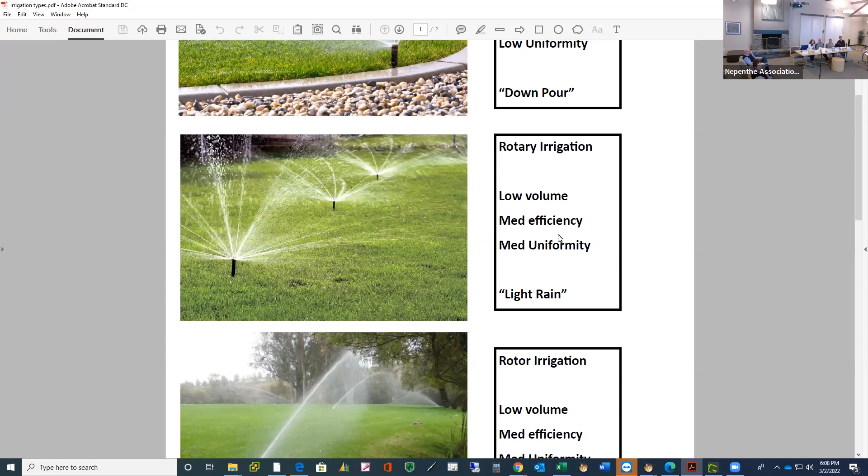And the newer style, and you have these on your community as well, we call them rotary nozzle. Nick? Yes. This is Mary Gray. Do you have the percentage of the number of sprinklers that we have of each one of these, so we would have a feel for what's out there in our community? I don't have that for you today, but I certainly can get that for you. Thank you. You're welcome.

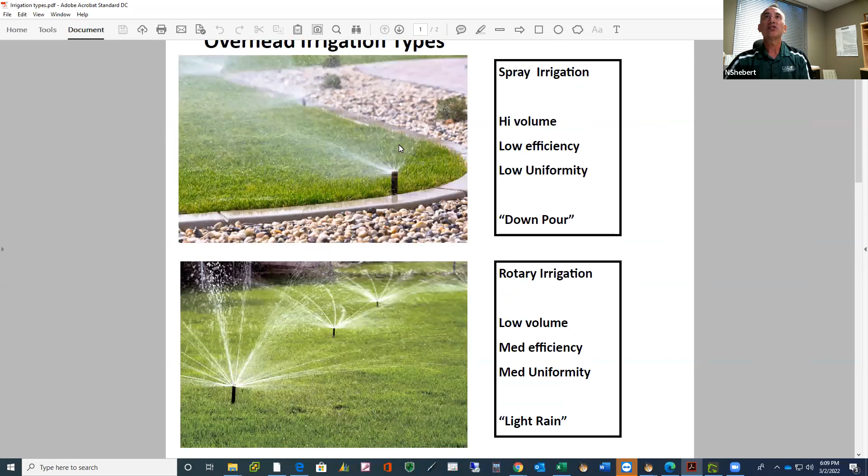The next would be the rotary irrigation. So there's been a big push over recent years to switch to these style nozzles. They're pretty recognizable. They have these streams of water and they slowly kind of rotate. If you compare it to the first one, which is a high volume, these are a lower volume output, which means they don't put the water out as fast. Their efficiency is considered in the medium range and their uniformity is medium as well. So in my rain scenario, that would be more considered a light rain application.

The application of these tends to be less than the rate at which the soils can absorb them. So they're a lot better at it, and they are less affected by wind. So you don't get as much off-site movement of water, and they tend to distribute the water more uniformly as well. And then the next style that you have are rotors. They're pretty recognizable as well. It's a single stream of water that shoots out, and then the whole head rotates that stream of water. That's also considered a low volume head, with medium efficiency and medium uniformity. Also would be considered a light rain.

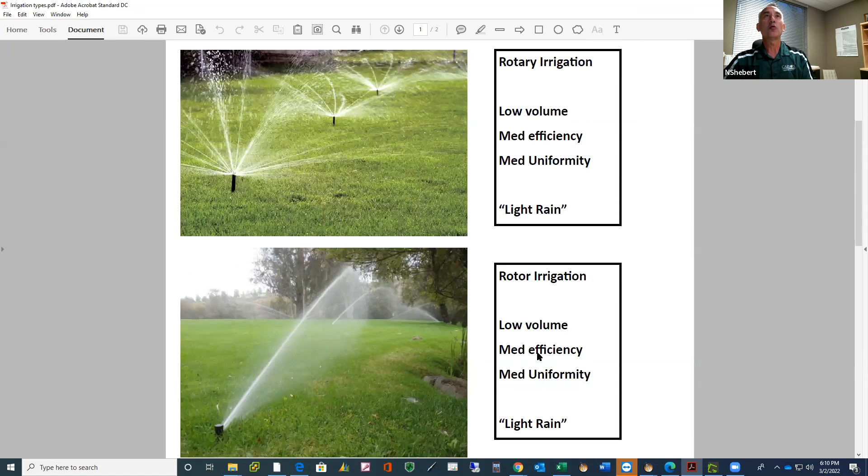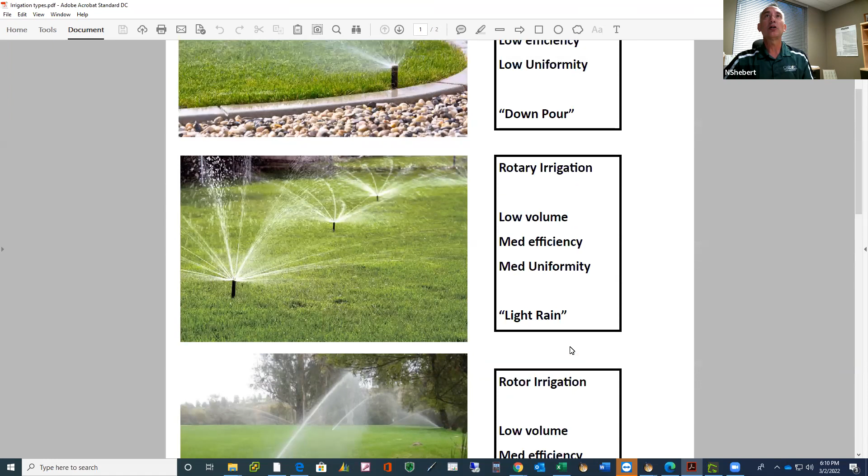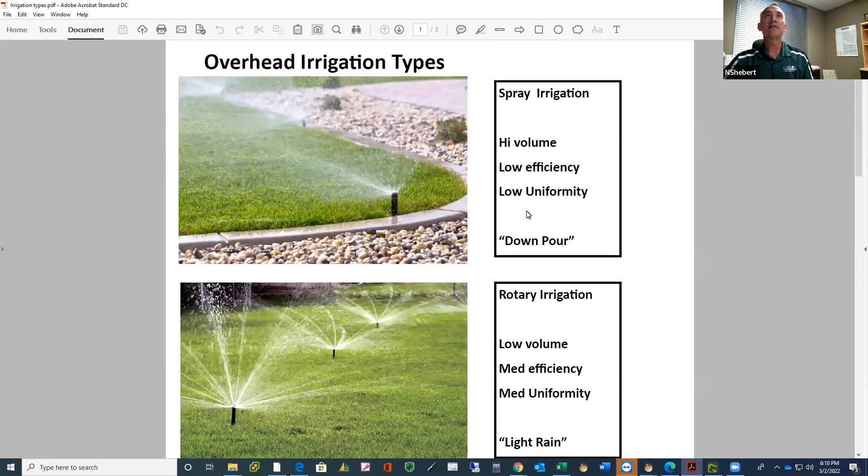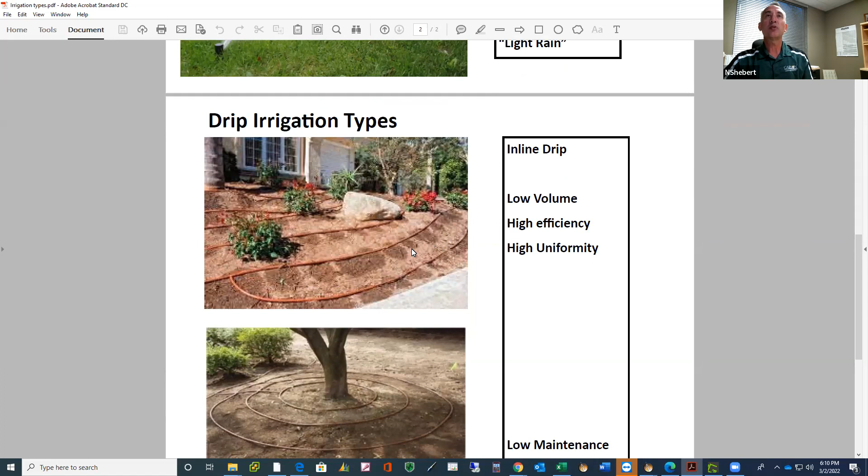So in overhead irrigation, the two preferred methods for the best use of water would be the rotor and the rotary nozzle. And just generally speaking, I'd say your spray irrigation is probably in the lower 20% when you look at your overhead. The majority of them were converted pretty well, but there's still some out there. And then we look at drip. So at some point in time, your community put in this style that we call inline drip. It's most prevalent around all the homes.

So there's basically a single tube that snakes around the landscape areas, and it has holes every so many inches where water drips out of it and makes the area wet. If you run it long enough, these wet areas kind of coalesce together. And if you were to dig down below the surface, like where it shows it dry right here, it's actually wet because the water soaks in as it goes down. So it might look like it's not getting everything wet, but underneath the soil it is. So this is a way we do it for a landscaped area. You could have plants put in throughout here, or here's how we handle them on trees.

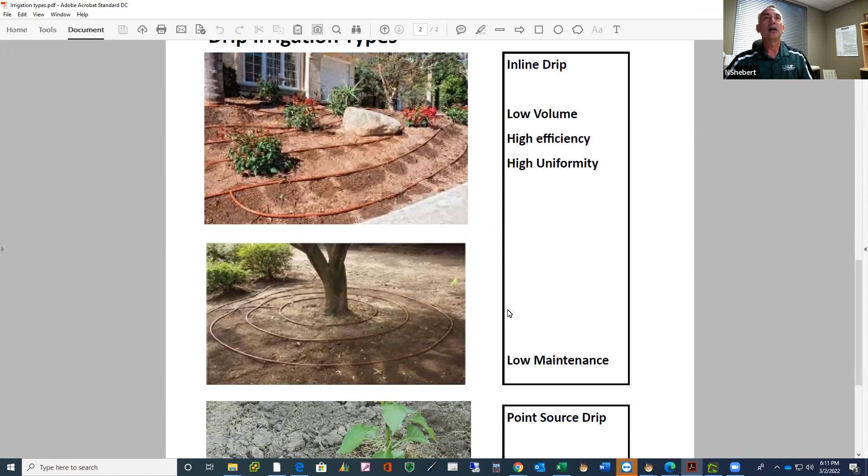It's a very good slow application of water. It's very highly efficient, meaning there's not a lot of runoff. So the water that's applied, most of it goes into the soil and it's used by the plants. This type of drip is considered a low maintenance drip versus what some people think of as more traditional. This is watering a pepper, so sorry, it's not a landscape plant, but still applicable. Basically you have a single tube running around, and everywhere there's a plant you have what we call spaghetti tubing with a drip emitter at the end of it. You don't really have that on your property, which is kind of good from our perspective, because this stuff takes a lot of maintenance.

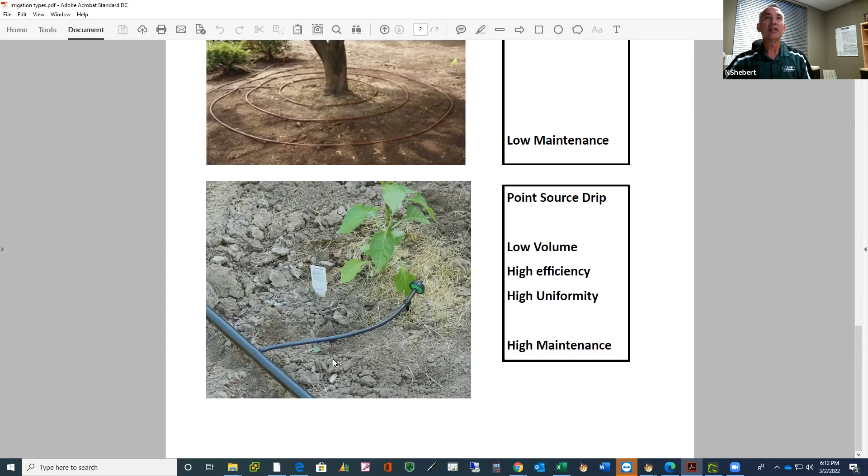It breaks easily, things get clogged easily. There's just a lot of trouble with these. So we don't have a lot of this going on. Most of it, all the drip you have is with the inline drip. Are there any questions about these basic irrigation types and the types that you have?

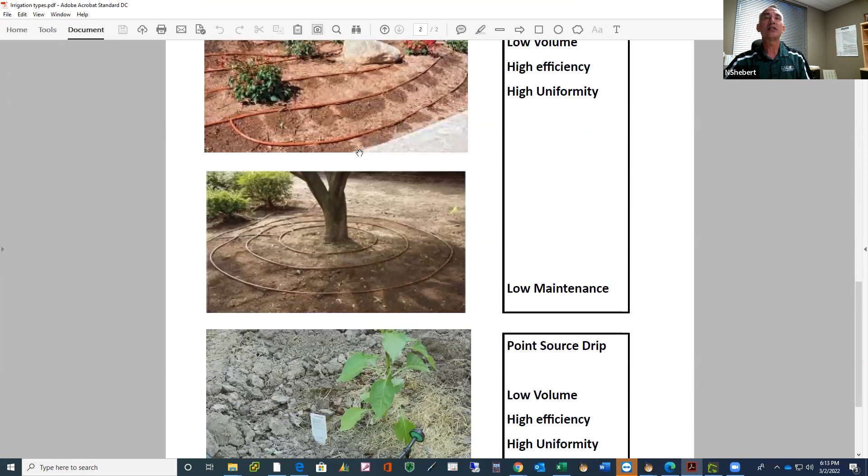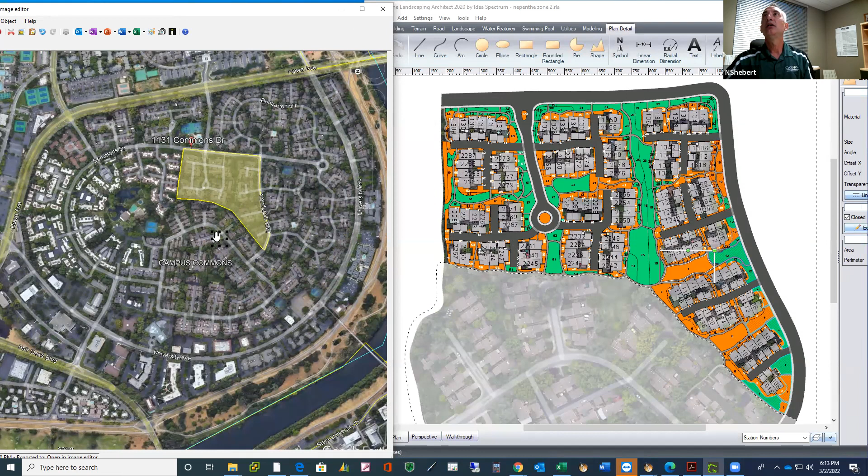All right, great. So I'm just going to jump into a map here. So here's kind of an overview of your property, of your different zones. I'm going to pinpoint here on zone number 2, which I have highlighted in yellow, just to give you a reference point. So we're going to jump over here and zoom in on that. So here's that zone 2. If we could see, the clubhouse would be up over here.

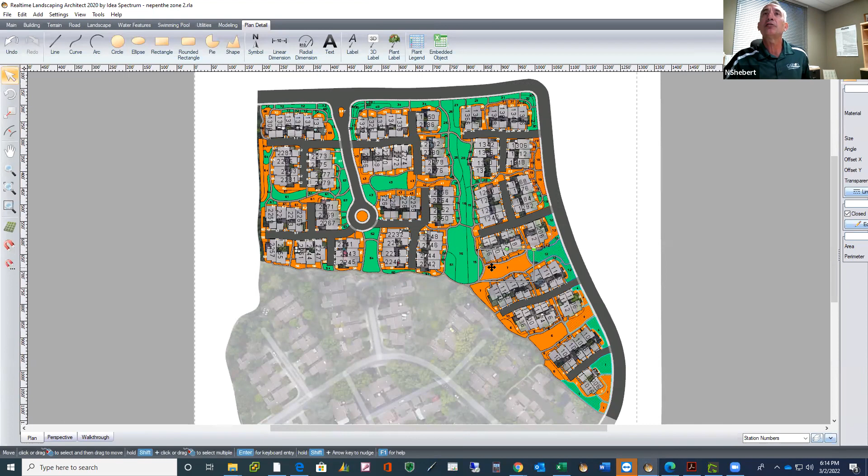And the way this works is, this is a result of the mapping that we've been working on for you guys. We have all your zones mapped in this manner. And I'll zoom in so you can see it better. I know it's very small. The green areas are turf areas. The orange are just shrub, ground cover, trees, basically anything but turf. And then as I zoom in here, the numbers are the station numbers.

So we call a valve a station in the irrigation world. That valve is attached to the controller via a wire. And when we turn on number 7, for instance, all the sprinklers attached to that valve will turn on. So the numbers here are that station number. The black numbers are over anything that's overhead spray irrigation, whether it's the 3 types: the rotor, the rotary nozzle, or the overhead spray.

And then the white is, I'll zoom in some more, the white is the inline drip. So when you did your irrigation system, they did a good job of putting the inline drip surrounding all the homes. I would imagine that's to keep the water from hitting homes. So that's a good thing. And the plant material is conducive to having that as well.

So in this case, when we turn on zone number 8, all of these beds with the number 8 on them get water at the same time through that drip tubing system going through this area. So zone 8 is a pretty big zone. If we come down to this little area here, zone number 2 is a much smaller footprint. For this one, zone 3 did just this side of the houses, and zone 5 did this side of the houses. Do I have any questions so far?

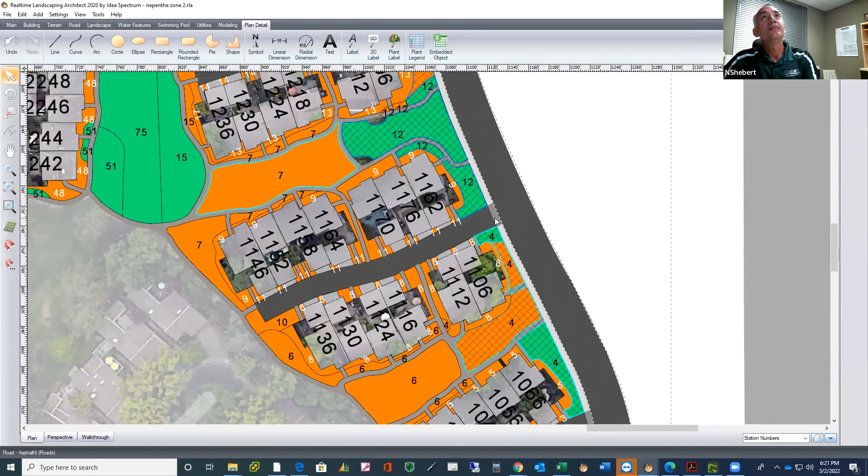Yeah, so there's varying situations and ways to handle problems like this. And I think what's chosen as the way to handle it is going to be dependent on each area. Like if I move up here, this number 4. Well, no, because you got this bigger piece of 4, but yeah, there might be a small area of turf that you could eliminate and make it all shrub. Might be a choice.

So to solve this, we have to look at each area and look at the right way to solve it. Down here, it's possible for these ones to take the drip line that's part of 2 and run it into all this number 1, abandon and cap all the heads that are here in 1, and just bring the drip tube out into all this one area. That's a way to do it.

So if we were going to try to solve some of these, each one would have to be taken on a case-by-case basis: what do you want out of your landscape in this area? Do we want to eliminate or change the plant material, or do we want to change the irrigation method? Or the third option is to put in two valves. One valve would do the green ones and one valve would do the orange ones. Each of those are possibilities that have to be looked at individually. All right, thank you. Certainly.

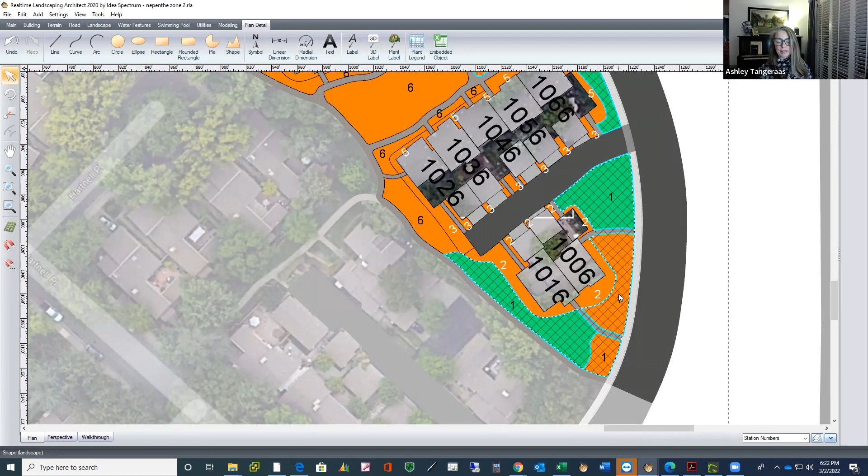So the other thing to think about when you have situations like this. Well, let's go over here. All these 8s, let's say you decided to renovate the alleyway right here and put in drought tolerant plants to save water. If you don't change the plant material out here that's also watered by number 8, you're not really going to save any water, because you have to water for the higher water use out in these areas while you put in lower water use plants here.

So you almost have to convert. If you want to put in low water use plants, you have to look at the whole number 8 as your renovation area if you want to do it for water conservation purposes. So that's another thing I'd like you to consider as you're thinking about what you're going to do. Let's just put in some drought tolerant plants? It's not quite that simple if you want to really save water.

Is it possible, Nick, to, I don't know, I'm picturing like little shutoff valves or things that would restrict the amount of water coming through, say 8, on certain portions of the line. Is there such a thing that can do that?

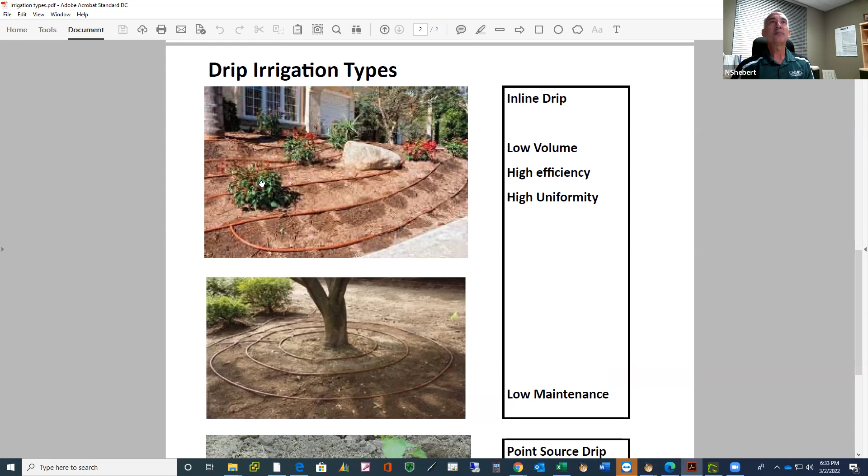Wasn't Netafim actually invented for turf? I don't know that it was invented for that. It was something they tried to put into use for turf. But there's many reasons why it doesn't work very well that I could get into if you wanted to, but it generally is not an effective irrigation method for turf.

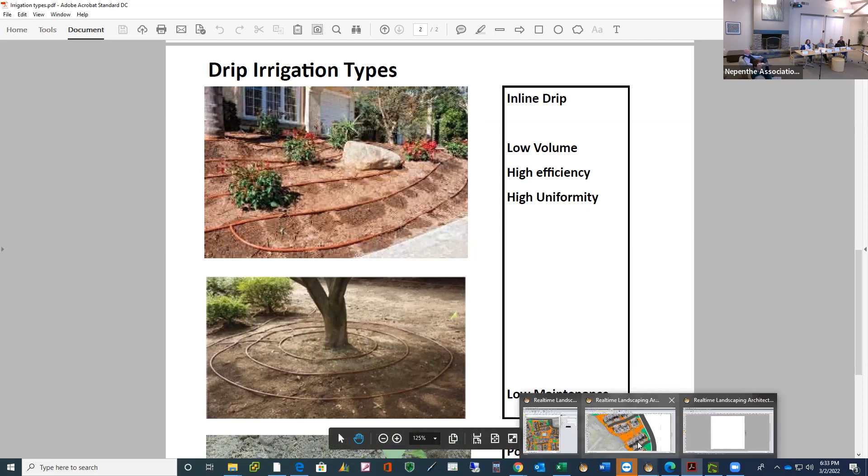Okay. Nick, we could talk about this for a long time. It's super interesting and I really appreciate your time. Unfortunately, we have a business meeting to conduct. So unless you have... That is all.

So just keep in mind as you're having discussions amongst yourselves about water conservation that this does exist. This is something that could be looked at. We could do a full study and try to come up with a plan for you if you guys want.

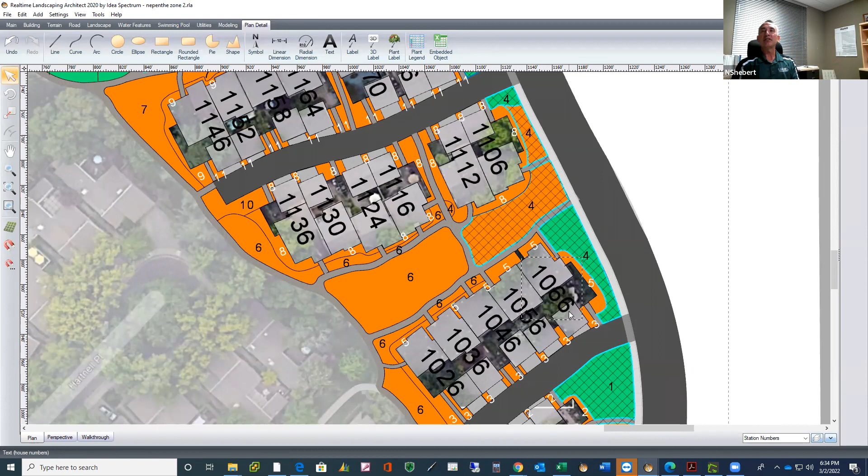And just keep that in mind as you're having discussions about water savings. The discussion is much more complex than just saying, let's change the plans.

Sure. Okay. Nick, thank you very much. You're welcome to stay for our meeting, but we'll probably bore you to death. So if you check out, we will understand. All right. Thank you.

This is Oscar. I just want to add something if I can. Sure, Oscar. The only thing that I just want to add, so you guys may be asking yourselves what we're doing right now to try to solve some of these situations that we have. So at this point of time, what we're doing, basically Nick knows about this.

So if we're running the Netafim for 30 minutes, we have the ability to do cycle timing on that and soaking time. So that means that if I'm running it for 30 minutes, it will run for 10 minutes and then wait another 2 hours, 120 minutes, so it can run again for another 10 minutes. So that basically also saves any runoff or anything like that. I just want to add that so you guys know what we're doing on top of that too.

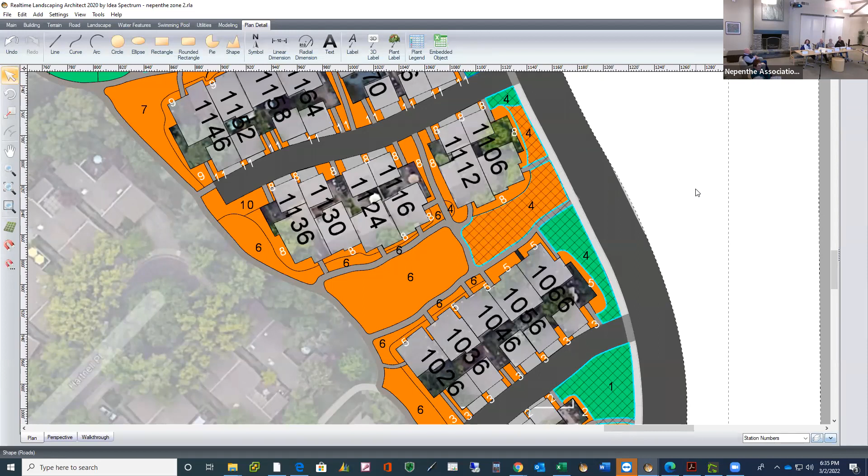Thank you, Oscar. I just want to say something really quick. Oscar made those brownies in the kitchen. So thank you, Oscar. Thank you, guys. You're multi-talented. Okay, Nick, thank you very much. You're welcome. Again, you're welcome to stay on. We'll probably put you to sleep though. Okay. Yep.

Let's move on with the rest of the meeting so that we can be a little bit efficient with our time. I'm not going to call on committee chairs unless they have something to say. So any committee chairs who have something they want to add, you're free to do it. Otherwise, we're going to keep going. Hearing none. Okay. Betsy, you have a management report briefly? I have the management report in your packets.

Ken, did you want to address the board? I just wanted to comment on the one. This is Ken Luttrell, Chairman of the ARC. Yes, this is the month of the architectural applications for windows. That's all we had were windows, 7 of them. I just wanted to comment on the one on the consent calendar, 206 Dunbarton Circle. We had not submitted a recommendation for approval. I understand you have now. Yeah.

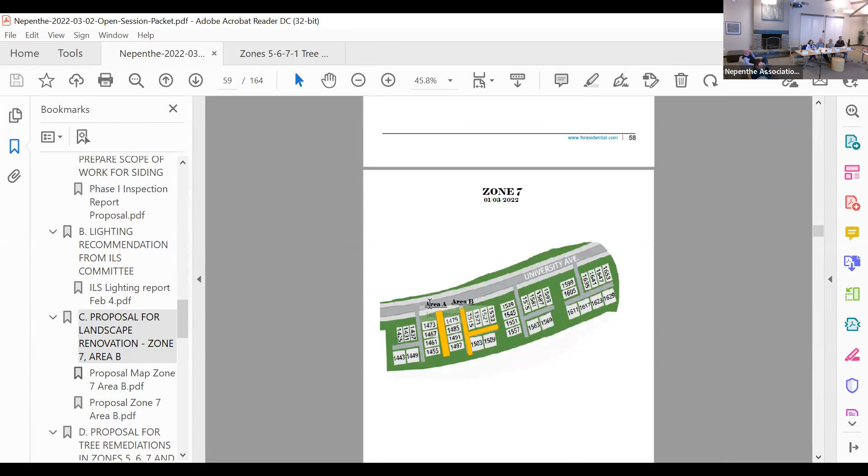Our understanding is that perhaps the board is inclined to initially take care of phase 1 and 2, and I can take us to that proposal as well. So this is the area in question, area B, it's an alley. And if you come here to the proposal, phase 1 is removing the old material, cleaning up the area, preparing the soil, hauling away the debris and backfilling with bark.

Phase 2 is setting up for new plants, and that's preparing the irrigation. And as we just saw from Nick, it's really important to make sure that we get the right kind of irrigation. So there's 2 costs there, one for phase 1, one for phase 2. And then we would hope that the board would approve phase 3, the installation of new plant material in this very overgrown alley, within a couple of months.

I think the idea is to allow people to see what it looks like after the removal and then go back and plant it. And I know our grounds chair is here too, if you'd like him to speak to this at all. Steve, would you like to address this?

Yes. Just a review. This is something that we've talked about for some time, and you might recall that Zone 7 was next up for this type of work. And so we identified 2 possible areas there. This area B would have the greatest benefit because it's a high concentration of big, heavy shrubs. It's in an alley, a T-shaped alley. So it would have a major impact on the amount of routine maintenance we'd have to do in the future in Zone 7.

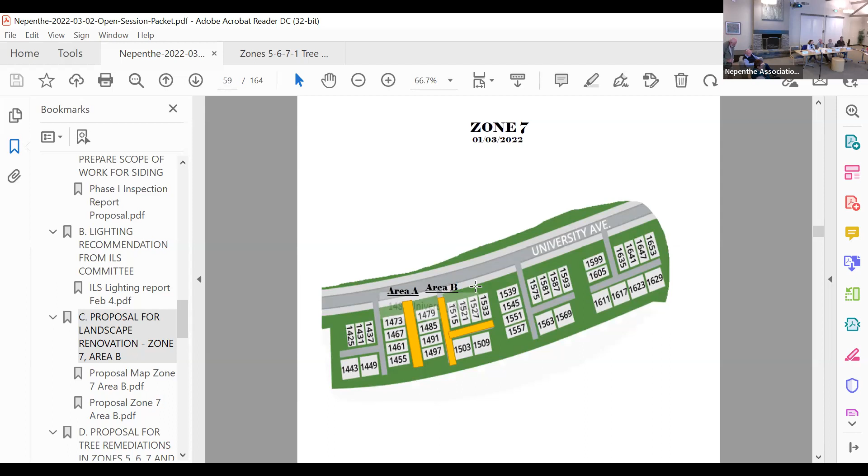Okay, that it? Okay, thank you. Comments from the board, questions from the board? Yeah, I did walk this area and I mean, I don't think it's that bad, but I definitely want to wait on it.

I hope you can't hear the music in the background. I've got a teenager here.

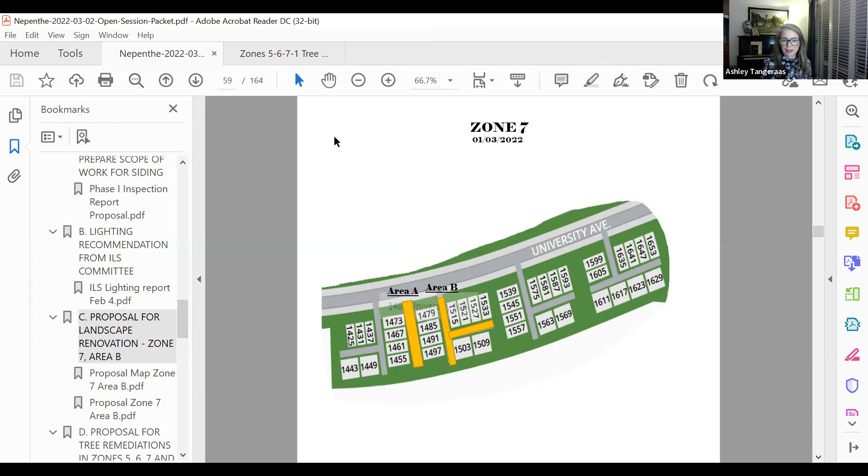But we are hiring the landscape architect to give us some design advice. And I think, based on the irrigation and just other things we're going to be spending money on, irrigation takes priority. And then I just think we need some more design help, and I think we're going to get that here pretty soon. So I would say I want to hold off on spending this kind of money before we figure things out. Other comments from directors?

I do have a comment. If you look at it, it's actually phase 1 and phase 2, and then also phase 3. And phase 3, we would have to agree that we will finish that up within a certain amount of time, because I think we really don't want to let this area be bare. And I would like to do this in a very efficient fashion to finish this area, so that the homeowners have a complete area and not just half or 2/3 complete. If we do 1 and 2, we really have to commit to phase 3.

So you are not in favor of approving any of this right now? No, I am in favor of approving it with the stipulation that we will do phase 3 as well, okay? All right, let me understand this. Right now, we have 3 phases. 1 is to remove material, 2 is to address the irrigation, and 3 is to do the planting. Correct. Okay, are you suggesting that we do phases 1 and 2 as long as we can take care of phase 3? Yes, the committee recommendation is within 2 months. Okay, all right.

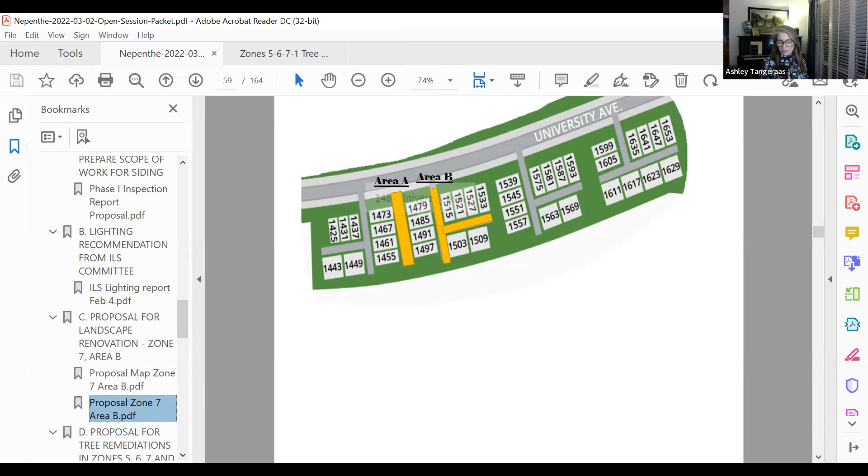And we have an improved plant palette, a little bit more design direction. As I said, I walked that area, even though it's a little dated, it's nothing egregious. I'm going to vote no for it, but I've seen areas in our community that are much worse than this, and this is just not a priority for me to be spending $65,000, $6,500 a house.

Okay, any more comments from directors? All right, we have a motion to approve this, to do phases 1 and 2, and completing phase 3 within, I think, 2 months. Frankly, I think we will have information from our landscape architect by that time. Betsy, would you call the roll, please? Baker, aye. Gray, no. Tangeraas, no. Cook, yes. And Dasher, yes. Motion carried. Thank you.

All right, the next item is the proposal for remediation of tree removal areas. Am I saying that right, Betsy? Yes, we call it tree remediation because once the tree is taken out of the ground, it certainly needs remediation. So these are areas where trees have been removed and what we have is nothing. Correct. So proposals were made for the remediations, but that was when Coast was the landscaper. And due to their poor performance, the board did not feel they could, in good faith, grant proposals to them for any more work because they couldn't maintain what was already here.

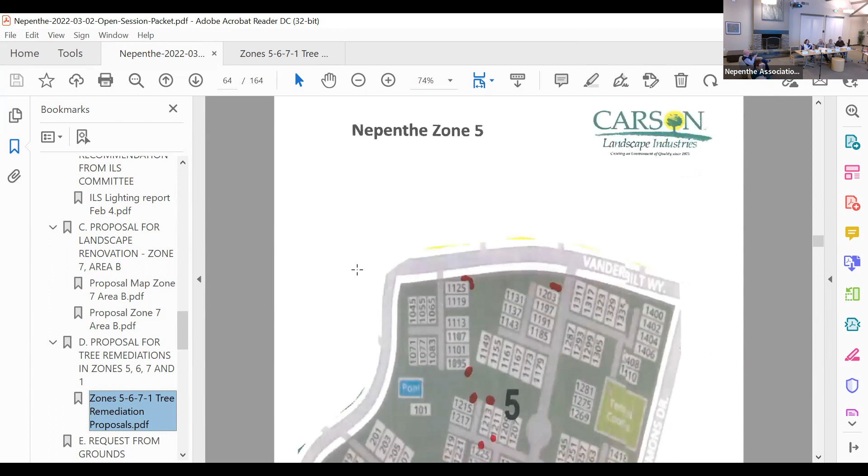We have a request to take care of some areas that need it right now, and actually that have been sitting there for a while. And then the second item immediately after this agenda is to give you guys the authority to come back to us with a policy so that we're not all backed up like this in the future. Exactly. Okay, got it. The two are related. Right. All right, comments from the board members?

I do have a question. Maybe Steve can answer that. So if we approve this, will you guys work with Carson to possibly implement different water valves, the irrigation, at the same time too? In many cases it's included in these proposals, and you can actually see it if you look at the detail. Yes, some realignment of irrigation is part of the deal. She's highlighted it. Yeah, it's right there.

And what's so interesting, some of them, the photos are a little hard to see where the problem is, but this is right next to Julie Lane's house in Zone 5. Almost as soon as she moved in, we took out 3 big birch trees right here because they were at the end of their life, and there's just nothing there. And in other ones, you have really obvious holes in the ground. There was a tree there. I'm not saying it needs a tree there, but it needs something, because that's just a big hole full of sawdust.

Betsy, I actually remember specifically in front of Julie Lane's house there. We were standing there, I think it was us 3, when I was on the grounds committee, looking at those birch trees. That was my first zone walk with the arborist. I was actually rather shocked that we had a company for the grounds and then the arborist, and they really did not work together. Not that they wouldn't want to. It was just two separate companies and contracts designed so that they didn't work together.